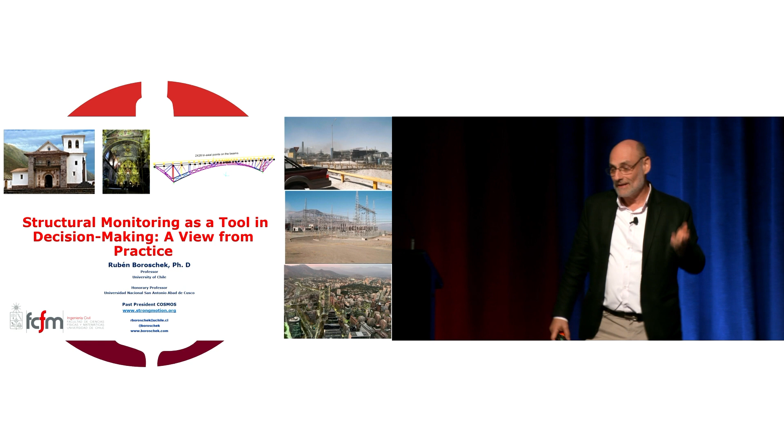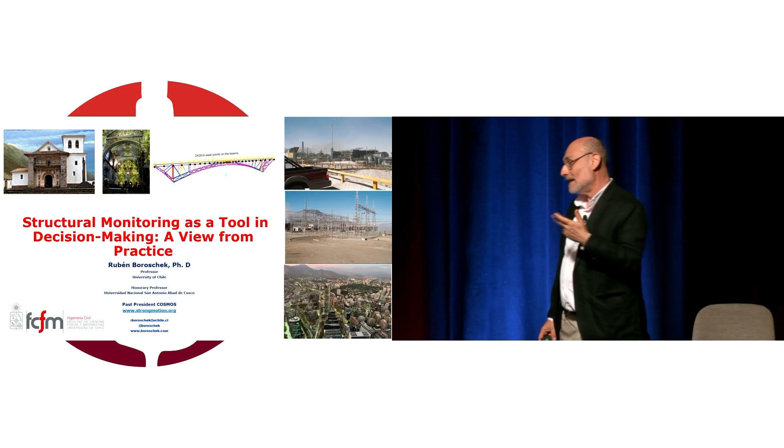We monitor with some trucks that pass by, and we were able to capture the dimensions of all the sections. Later on, about 6 months later, we were able to confirm that the sections we picked from data were okay. We have been doing this in the mining sector, mainly in Chile, but also in the electrical sector and in buildings, of course. So all this work is a mixed effort of university with a lot of students, also at the office with collaboration with many professors and engineers.

Monitoring is for existing infrastructure, mostly on the maintenance side. In order to maintain a structure, hopefully you have all the design and construction documentation, the maintenance history, the current condition of the infrastructure, all the environmental conditions that the structure is experiencing, whatever code changes happen, and if you're lucky, you have some monitoring there, and you do something with that information. I'm gonna stop on the last 3 points during my talk.

At least in Chile, we are mandated by law to monitor all dams, any type of dam, mining, water resources, whatever you have. If you have a dam, it has to be monitored for safety, and it has to report within a maximum of 3 days after an earthquake whether it's safe or not. The 3 days is because at the beginning these were analog sensors put in the dams, and there was no time to retrieve the data and do the analysis.

Now it's nearly immediate, as I'll show you some examples. In industry, only critical infrastructure like LNG, and some specific types of structures, have sensors in Chile, at least. Bridges, very little. And buildings, only where there is a problem, or if it's a hospital that has base isolation.

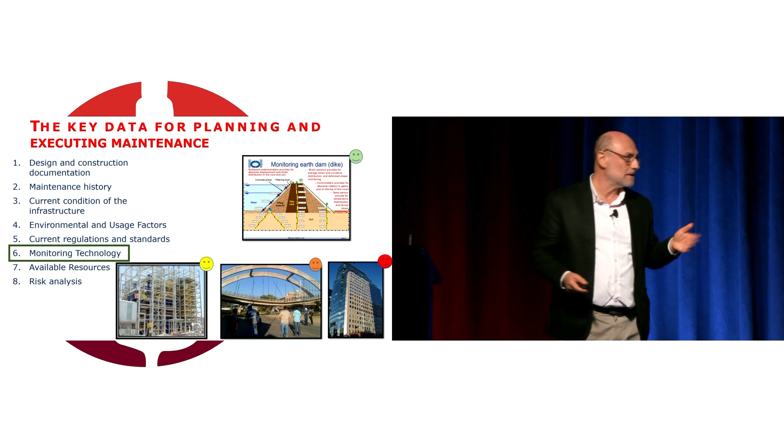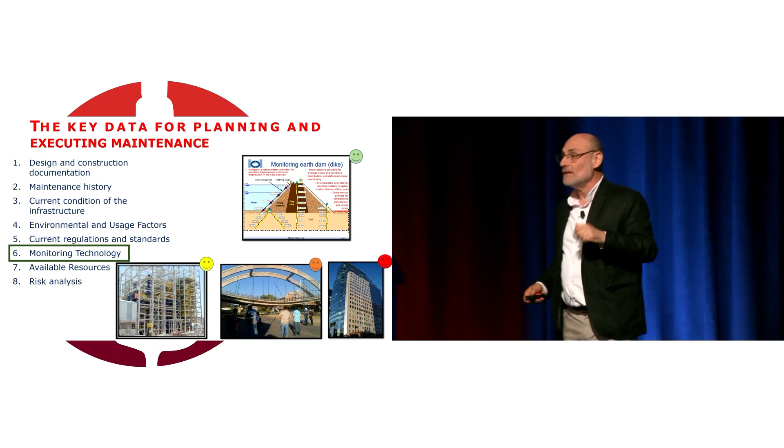We are now building most of our large hospitals, 1,000 beds or higher, with isolation, but also with monitoring, because we already had trouble with some isolated structures that users modified, and we didn't realize it before, and during a small earthquake they didn't behave properly.

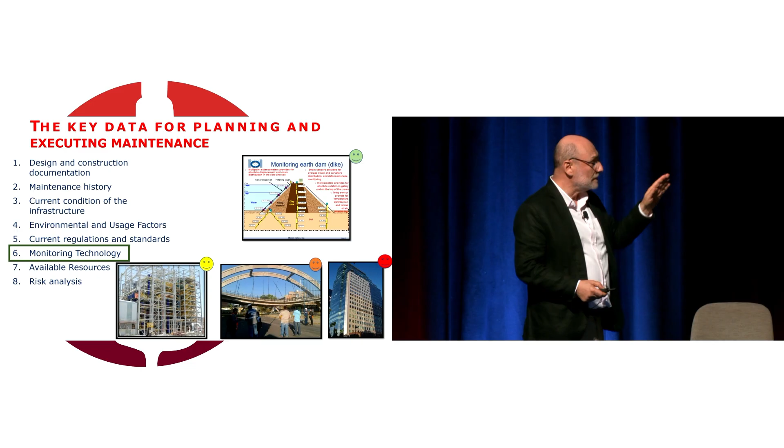So this was critical. But it always surprised me why civil engineers, the structural engineers, are not used to having data of their built environment. Why are we always so reliant on what we did at the design stage.

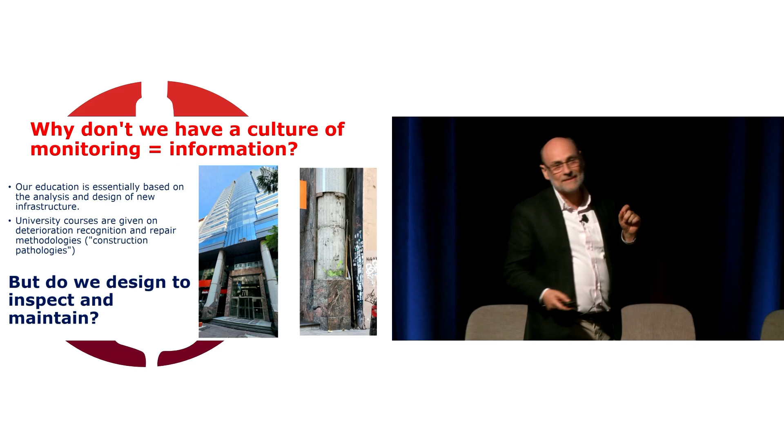At the university, I'm a professor of experimental dynamics. We teach how to design new structures. We rarely teach how to maintain a structure, or more rarely, how to design a structure to be maintained. So we just live with whatever we design, and we trust our design in such a way that it will never have to be maintained or inspected.

For example, in the building on your left, you see these two columns are critical for this 35-story building. But if an earthquake occurred, and in Santiago, where this building is, we have an acceleration of 2 to 5% g at least once or twice a year, and 10% g around every 5 to 10 years.

If the owner asks you to go and inspect the building, the first answer is that you will do a walkthrough. But if those columns are full of marble, there is no way you can inspect that structure. So you can offer the owner to remove all the marble, and then he will say, no, I will look for another engineer.

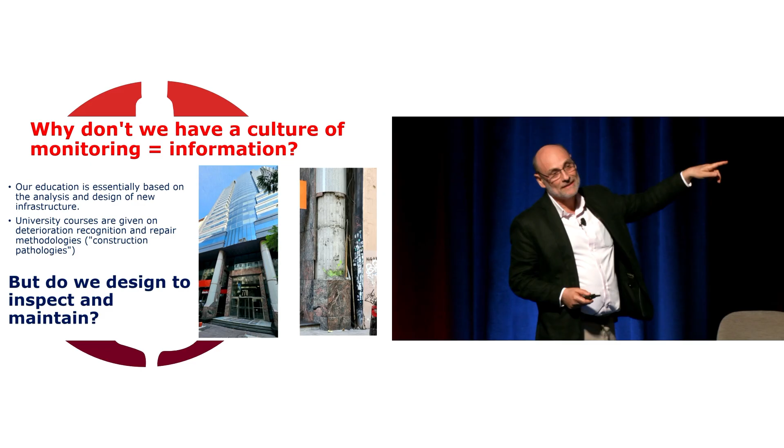So if there were damage, and it didn't express on the surface, there is no way you can control things. And we don't design for this. We don't design for inspection.

For example, this building is 54 stories tall. The first floor is 14 meters tall, and it's encased, a steel pipe with concrete-encased columns. Everything after finishing is covered with marble again. This building suffered damage during the 2010 earthquake.

The owner asked us, is there any damage on this building? And in order to answer the question without monitoring, we would have had to remove all the cladding, and that was not an option. I'll tell you what the option was, but first I'll tell you a couple of sad stories.

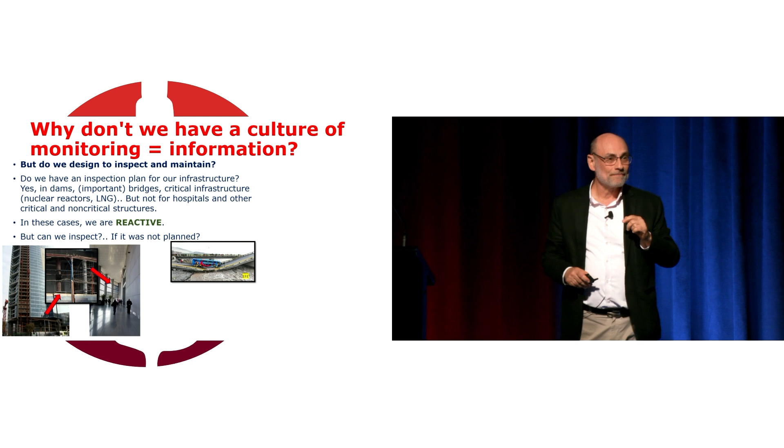For example, this bridge is in Peru and collapsed last month. Can you inspect for scouring? It's very difficult, especially in non-clear waters. So how do you do this?

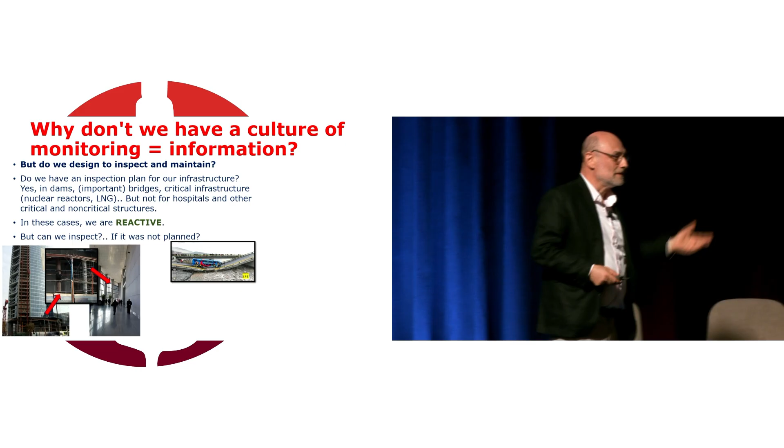You send an engineer to inspect the bridge — what can he do? He looks from the top, or with some special tools, but he will not go underwater, especially in this type of river. You know there is scouring, but there is no way to control it. He goes back to the office and says, I didn't see anything. And then the collapse occurs.

This structure also collapsed last month, killing 8 people. This is the courtyard, the food courtyard, of a commercial center, and there were people inside.

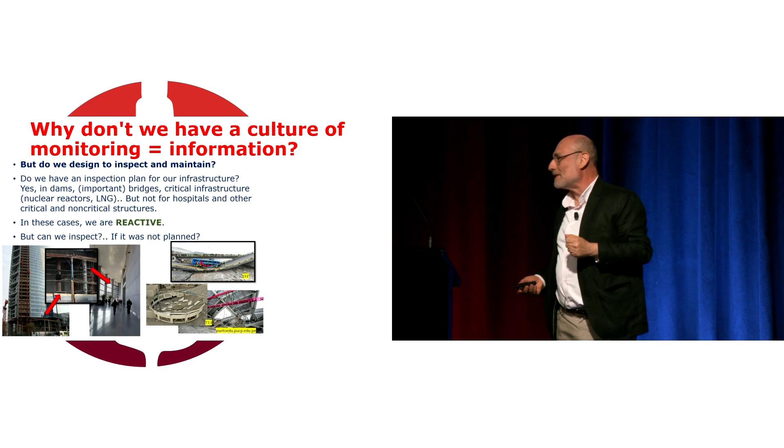The owner of the structure knew it had a problem, so he sent an engineer to do an inspection. But the roof was more than 15 or 20 meters high, so he just stood on the slab, looked upward, and said, okay, the only way to inspect this is to go up and remove whatever covers the main elements. But he didn't do it because the owner didn't pay for that type of work.

So 8 people died. Yesterday, or the day before yesterday, 130 people died in a dancing place in the Dominican Republic.

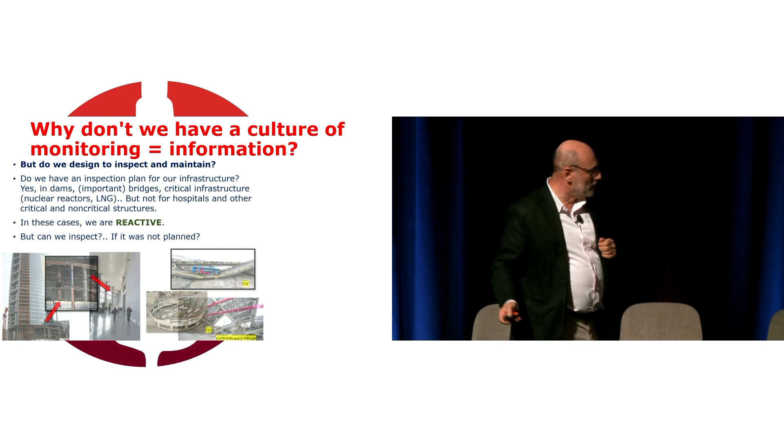There is another case that for me is extreme. It's another building in Santiago, like a 30-story building, or 25-something. And you see a column that is 5 stories tall.

During the design, the architect asked the engineer to make the thinnest column possible. So the designer, worried about the overturning at a corner column, did a nonlinear analysis, made a very thin column, and put some irregularities in it in order to capture whatever axial load was going there.

And so he ended up with the thinnest column he could develop with the analysis he was doing. Once he finished, the architect saw the column and said, no, this is too thin — I will cover it up with a bigger column so people trust the building.

But the engineer didn't change the size of the column. It's a very critical column designed with nonlinear elastic element for compression and everything else. But when you go there and see it from the side, it's very thin. It has gone through 2 earthquakes, design earthquake, 0.4 to 0.5 G at the ground. No inspection done, because to do the inspection you have to go 5 stories and remove all this cladding, and they are not willing to pay for that.

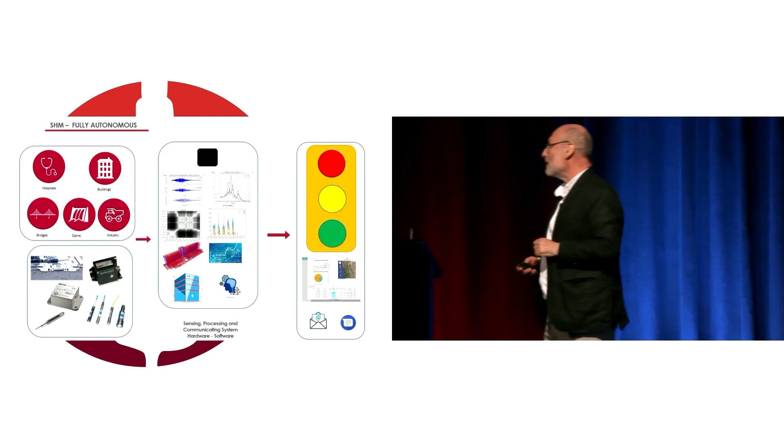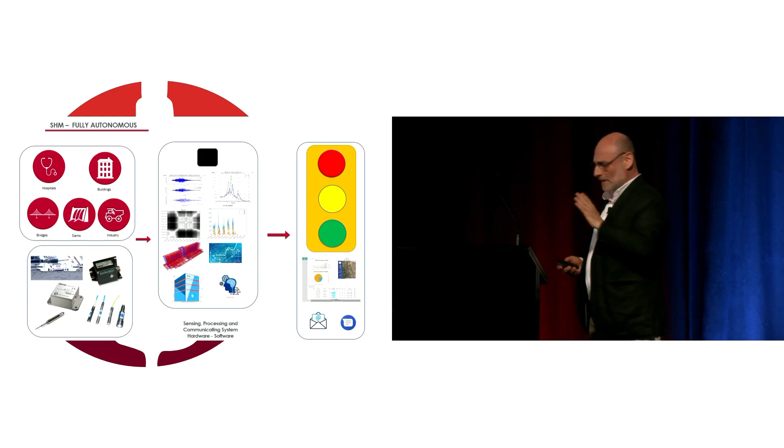So in some structures, as I'm going to show you some examples, we do monitor. Hospitals, dams, some key bridges, and maybe some industry. The idea is to put sensors, any type of sensors that give you an answer to your damage scenario: strain gauges, pressure cells, displacement, tilt meters, accelerometers.

That should be sent to a computation center. It could be local or remote, depending on your resources and conditions. Then that analysis should be sent to you in a manner that is understandable for the person receiving the information. It could be a simple traffic light or very detailed data if you are an engineer knowing the structure you are dealing with. But it has to be fully automatic. We cannot do it manually.

And this is structural health monitoring. If you don't do it automatically, it's just monitoring, the standard things that we did maybe in the 50s or 60s. But if you are going to do it fully automatic, then we will call it structural health monitoring.

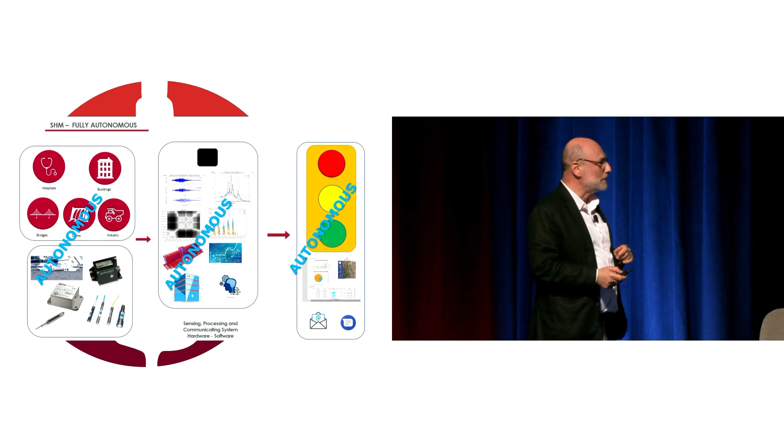And what type of sensors are you using? Well, we are using sensors that can send data. It could be wire or wireless, whatever we want. At the beginning, we started with very expensive sensors, maybe $1,000 or $5,000 per channel. But now we have these MEMS sensors for accelerometers and other stuff that are very cheap, $50 or something like that now.

And the thing I want to show you, as an example, is that we can use cameras now, video cameras, as a sensing instrument. And of course, the drones and things that were explained during the presentations earlier during the Hualien earthquake. So now we have a huge amount of sensors that we can use to detect what's going on in a structure.

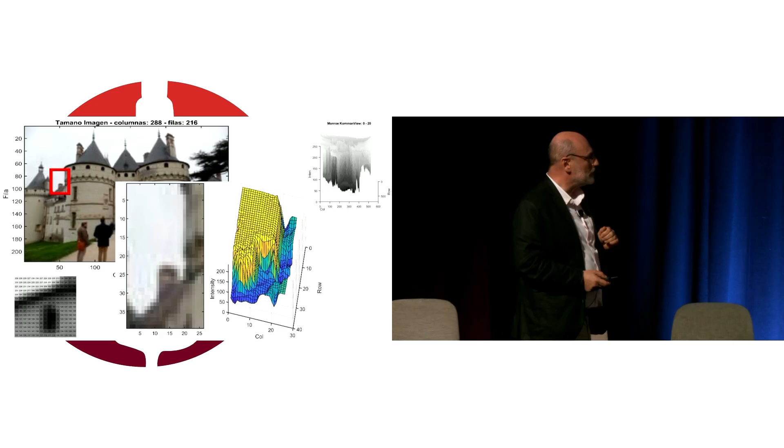So let me stop here for vision sensors. For those that don't know, an image is just a matrix of intensities, like having a matrix where the intensity is a number. So I don't know how to treat a video, but I know how to manipulate matrices. A video is just a sequence of matrices with numbers in it.

So what I do now is take, for example, the red rectangle you see there, the chimney of a castle, and represent that as a surface. And in the surface, I can get the maximums, the surrounding areas of that number, and get eigenvalues and many other things that we like to do with matrices. So that's what I'm going to do.

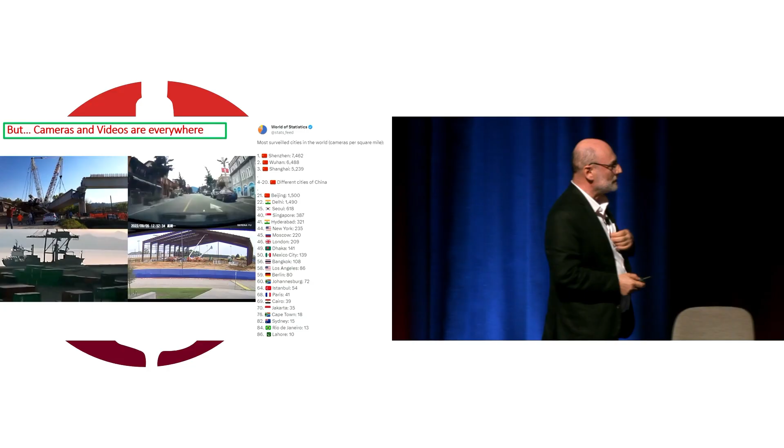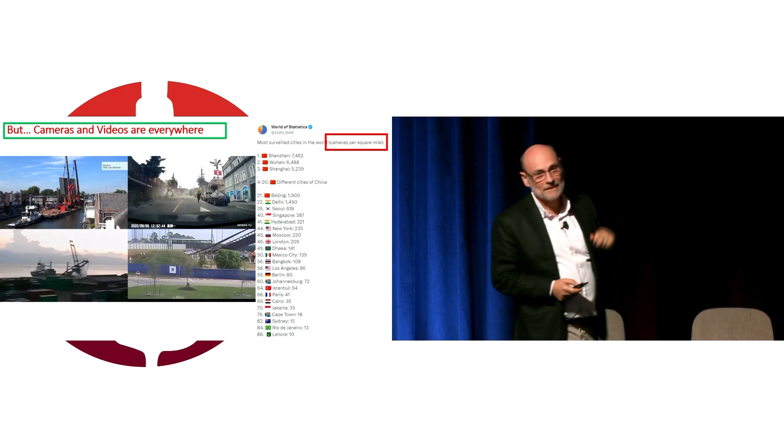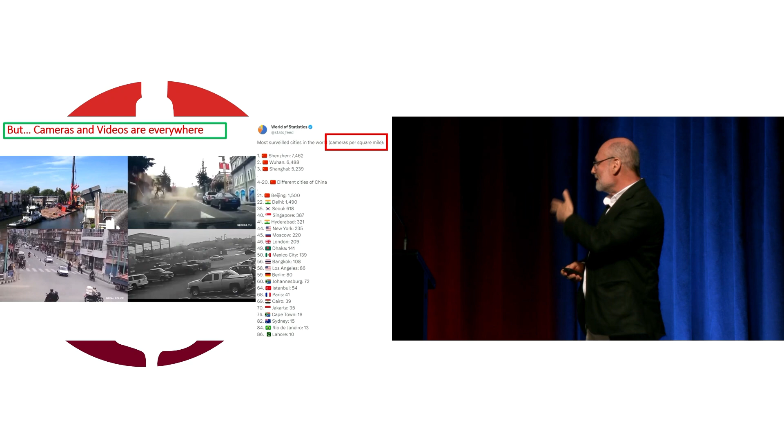The nice thing and the opportunity here - sorry, some videos are from earthquakes - is that there are cameras everywhere now. Imagine, in those lists I put there, this is the number of cameras per square mile: 7,500 cameras per square mile in some Chinese cities. But typically we will get at least 20 or 100. Actually, if you are in Japan, I have seen the news where they can follow a person all the time, except in the bathroom - that's the only place they don't see a person when they want to track him. So why don't we use this information? We have to just learn how to use it.

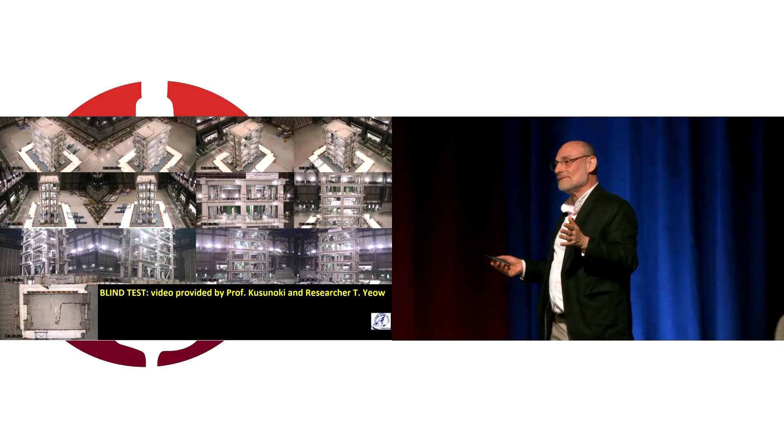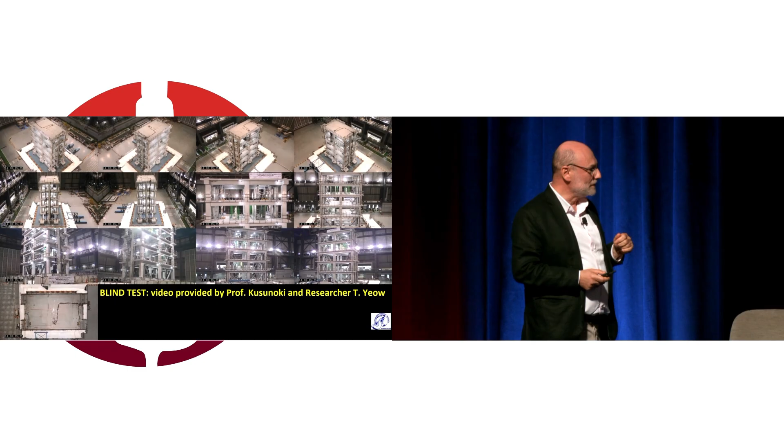So on my sabbatical 2 years ago, I went to Tokyo University and asked Professor Kusunoki to give me a video of a test in E-Defense, but just the videos, not the data. Trevor Yeow, who's from New Zealand, helped me with the data. He sent me the videos, and in a month I came back with what I can take from the videos. So these are the videos.

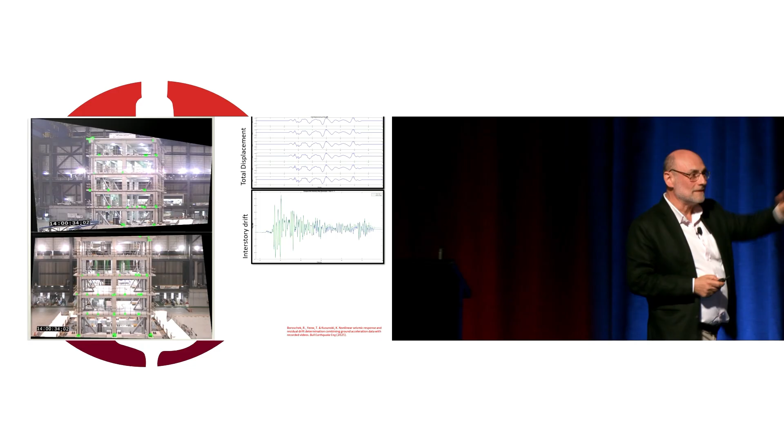So by doing some manipulation of these many green dots, you get the traces of the motion. If I get the difference between the traces on two floors, I get the interstory drift. In that figure you see in the middle, there are two lines, one green and one blue. They're quite the same. I didn't compare them myself, I gave it to Trevor Yeow. So this is the interstory drift for this building, and the error was less than 1%, okay?

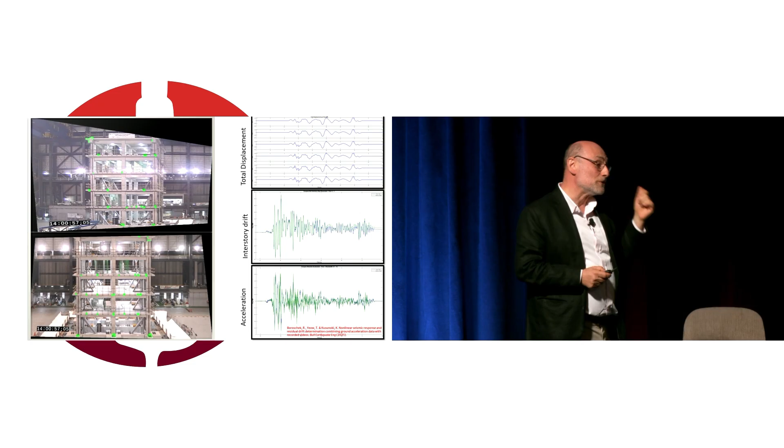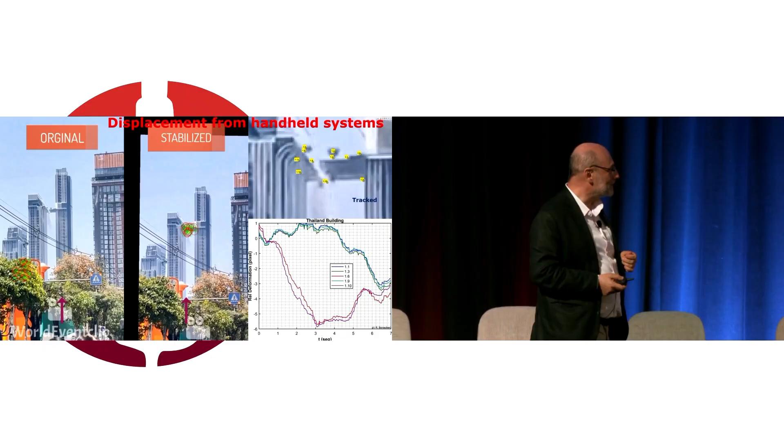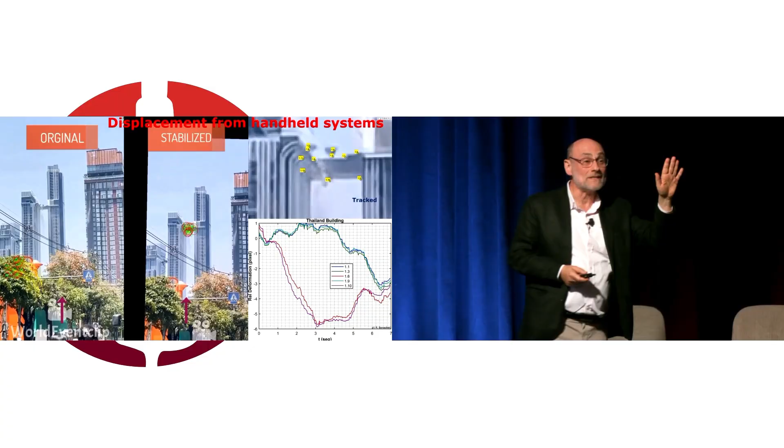For example, these videos from Thailand, I just did it three days ago. So I downloaded the video. The left one is the original handheld video taken by somebody, you can see a red arrow on the bottom showing how it moves around. The center video is where I take the video and center the matrices so it doesn't move, and after that I stabilize the video. You can see the boundaries change.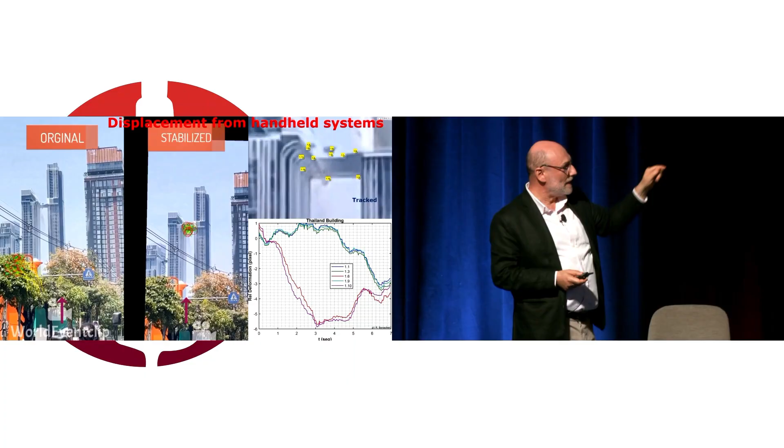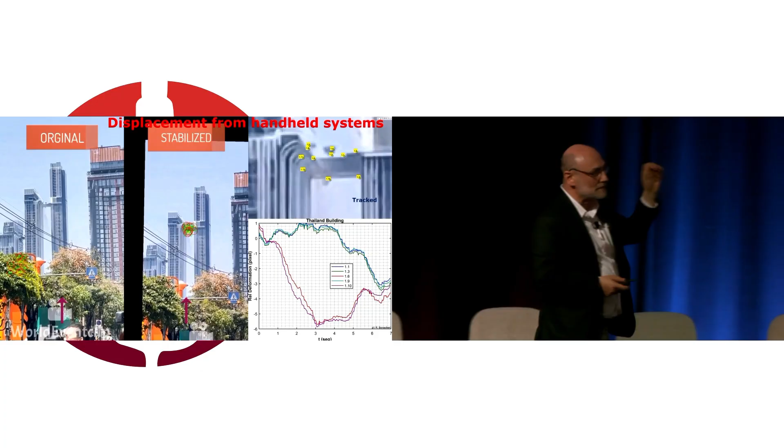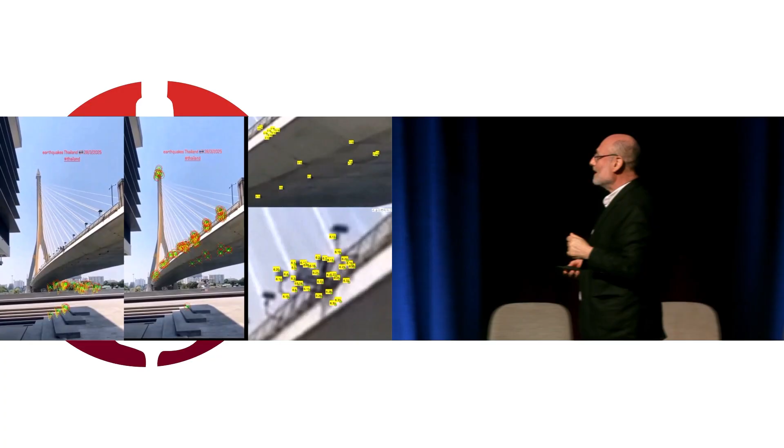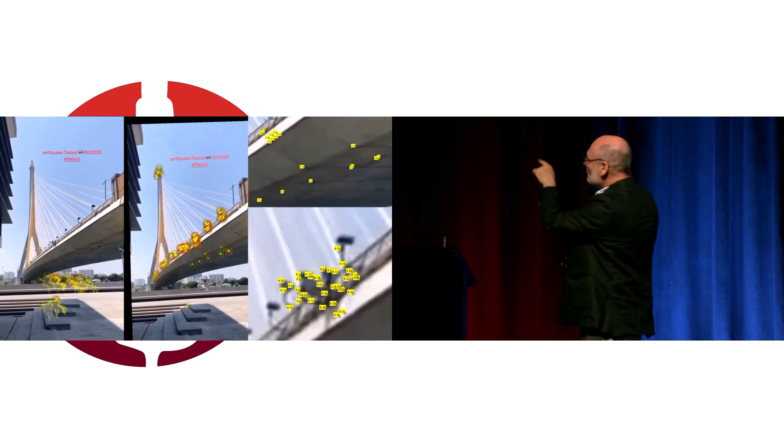But not only that - if I take the video of the cable stay bridge in Thailand again, on the left side you see the original video, and the yellow traces are from the handheld phone movement. I take that video, stabilize it, and get a stable system. You see it doesn't move anymore on the ground, but the bridge keeps moving. I zoom in on any place of the video, and now I have so many sensors on that structure that I can get the time history. We haven't put any sensor on the structure - I'm just using security or handheld cameras. Then I can do all my system ID that I know how to do.

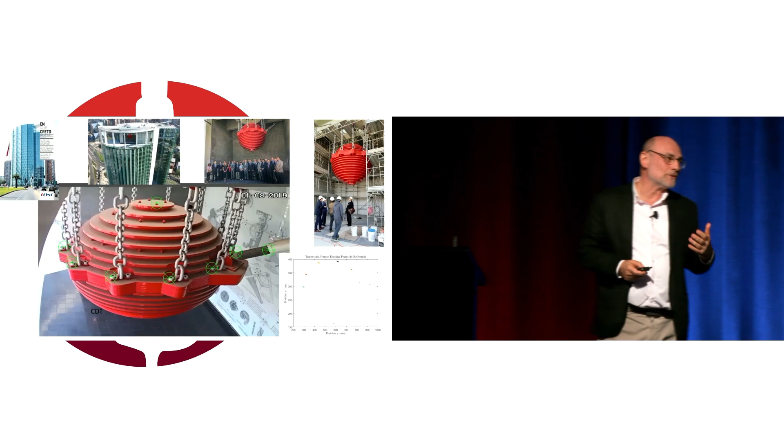It's very hard to use handheld cameras during an earthquake, but there are so many cameras. For example, in this building in Santiago, we have web cameras that cost $15, okay, that's the cost. But it's a bullet camera that doesn't vibrate during the shaking. So during the earthquake, it's looking at a tuned mass damper, a very short length tuned mass damper, but I can trace the motion instantly using just the video. No cables, no energy, except for the video camera.

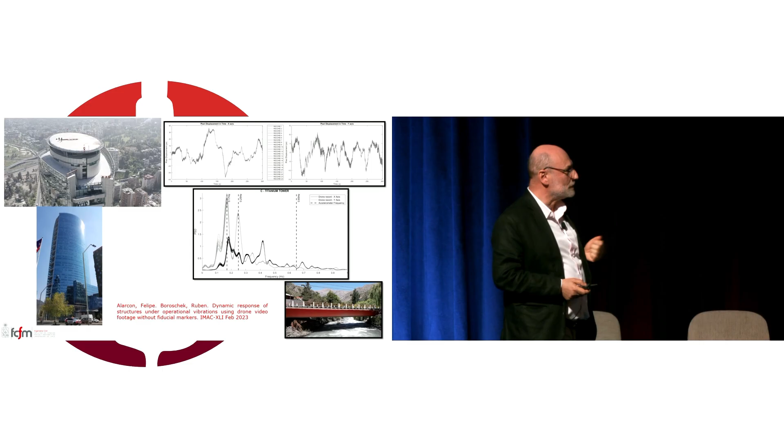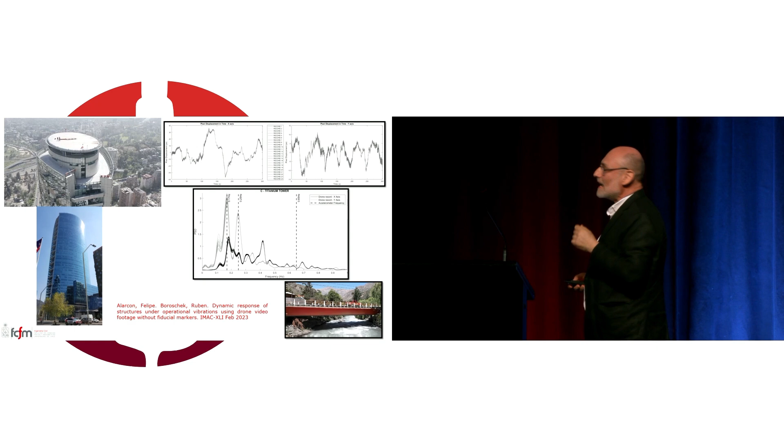Also, we have the option with these videos to use drones. So what we are doing now is flying drones around buildings - flexible buildings - and bridges, and we can actually get mode shapes and frequency from the drone video. It's possible just to fly around, and if the structure is flexible enough, we can capture it. On the top part is the drone video tracking, and in the center is the frequency, and the vertical lines are sensors we put in the building to have the ground truth, the real value for the frequency. The error is less than 5%.

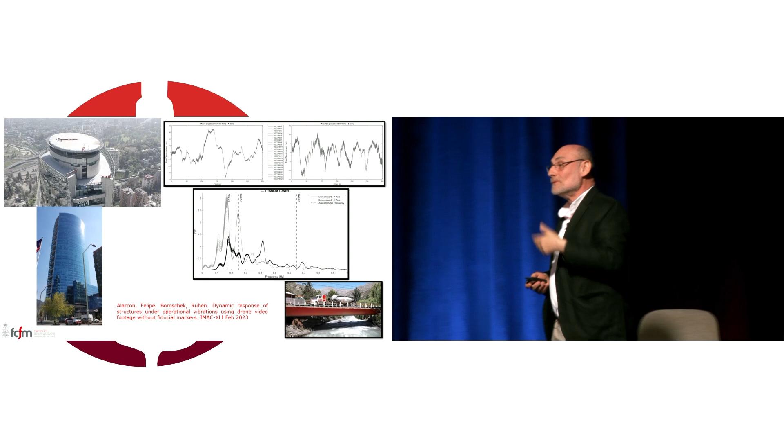But I didn't have to ask permission to monitor the structure. I just needed to fly around the structure, okay?

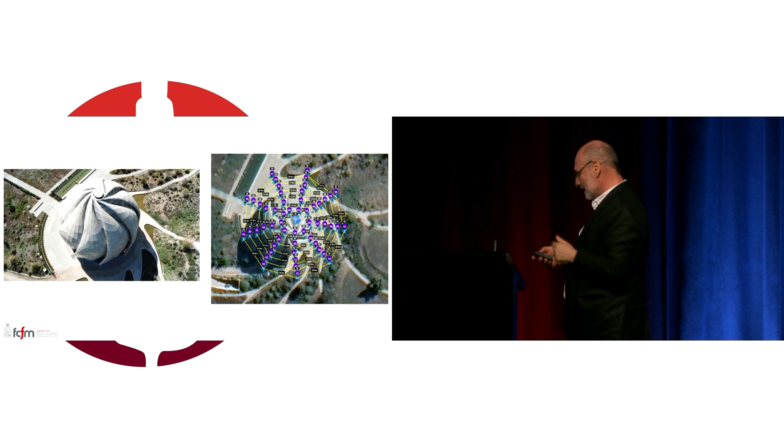With the Baha'i temple in Santiago, it's a crystal structure, very tall one. It's base isolated, so we offered to install a drone, a self-controlled drone. It parks itself, charges itself, and has a flight pattern defined by us. So we can fly around the structure automatically, get pictures whenever, as frequently as we want, and create a 3D model of the Baha'i temple. Also, the security cameras inside are looking at the ceiling, and I can trace the vibration of the ceiling without having to install anything. More importantly, I don't spend money on maintenance because the security cameras are maintained by the owners of the structure.

So it's a tool that is not the solution for everything, but it's contributing a lot to what we're doing now. So forget about videos, it's just a tool - it's not the center of my talk, but some example of decision-making based on data.

During the construction of this 54-story structure - the first building 200 meters tall or higher in Santiago - the owner of this building, who is an architect, hired us to monitor the construction to validate the design model of the engineer. The engineer was very happy because he's very open to observations, so he didn't have any problem with monitoring. Other people have a bad reaction to monitoring because they will be confronted with reality.

And when reality and modeling don't match, they have to explain things, take time to explain things, and maybe they don't know the answer why they don't match. Okay, so that's a problem that we can discuss.

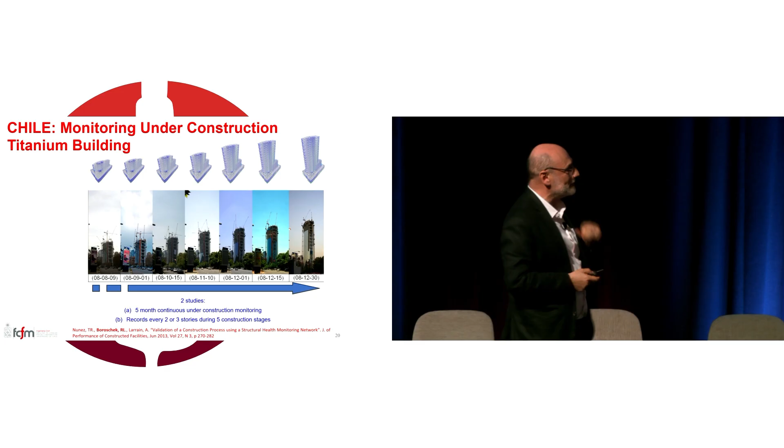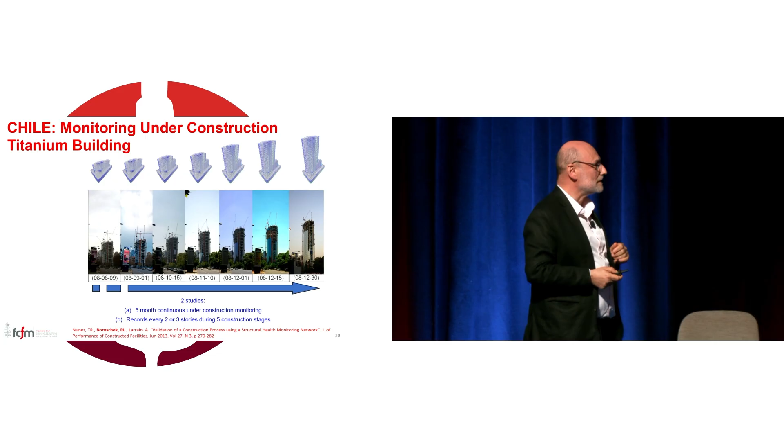In this case, we set up a program of monitoring with a few sensors that give the properties of the structure automatically every 15 minutes. Nobody was touching anything. On the left, you see lines going down. On the bottom, the x-axis is time in days. On the vertical axis is frequency, the inverse of period, the mode shape - the lower lines are the first 3 mode shapes of the system. So we monitored the system every 15 minutes for 5 months.

And of course, the designer said, you're crazy, I cannot even open my email with all the data you're covering. I just want to know if the model fits reality or not.

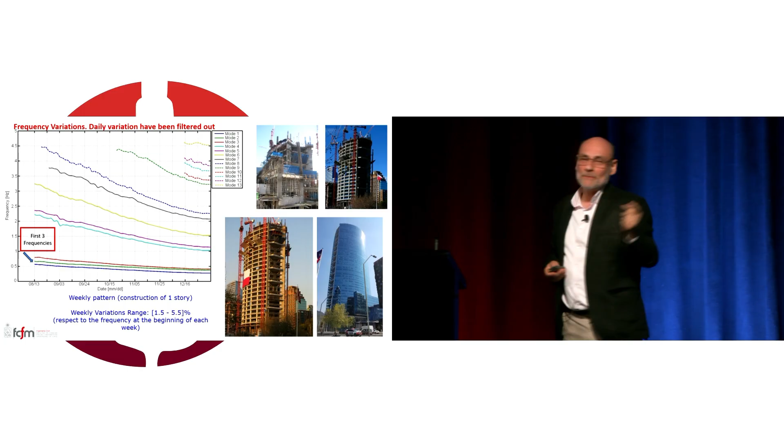So every week, we took the structural design model - not a digital twin, just the design model, what's called pre-digital twin model - and compared it with the data. It was very interesting because you see the first mode and second mode there, with 2 lines, red and blue - one is the model, and the other is the real data, the real period of the structure.

The second mode had a problem, just at the start, when we were at floor 6 or 7, I don't remember. So something happened, we detected the problem, we sent the information to the designer and the owner. They're quite open, so they sat and made a decision. They realized why there was such a big jump in the period - it was a torsion problem not considered at the design level.

So the options were: we demolish, or we evaluate the condition we have now and project what's going to happen with this building when it's finished, and then decide if we demolish or not. In this case, they didn't demolish, and it was finished as a different structure. But it was known, and the data was there to take the decision.

This instrumentation was taken out in January 2010. In February 2010, the 6th largest earthquake in the world occurred, and this building got damaged. All the balconies on the top part of the building fell, because this building is 200 meters tall and actually amplified motions in the vertical direction, not only horizontal. Even for a small earthquake, you can notice how the building is elongated in the vertical axis, so it amplifies a lot.

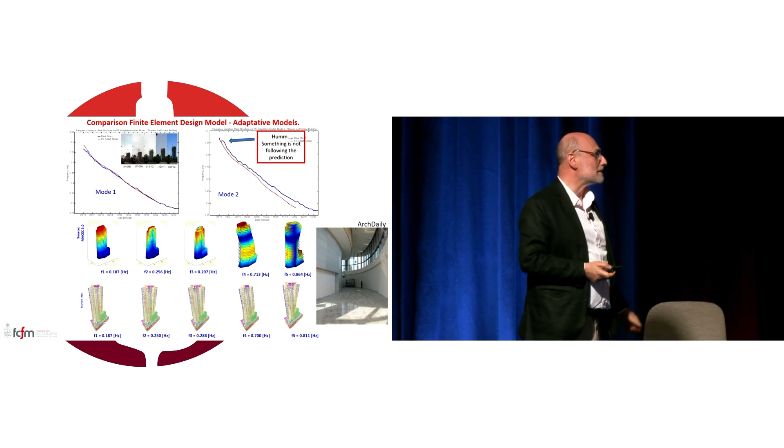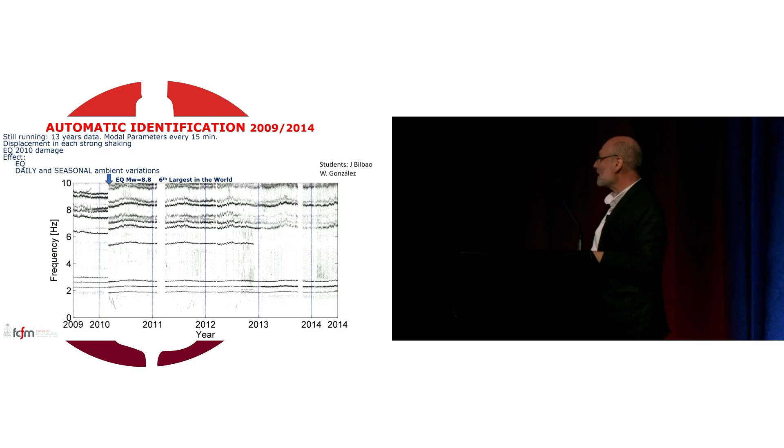We have been monitoring continuously - structural health monitoring - since 2009, so nearly 13 years now. What you'll see here is for a 9-story structure, again with lines - look at the bottom 3 lines. There's like something sliding down right there - that's the occurrence of the 2010, 8.8 magnitude earthquake. These lines are natural frequencies, the inverse of the period.

This building suffered a drop in frequency that we captured in less than 15 minutes and communicated to the owner - that's us, because it's the faculty of engineering. We knew it was damaged, a 20% drop in stiffness... in periods, so a 40% drop in stiffness.

So after inspection, it was decided that it just needed paint - there was no retrofit or any repair. This is a 1960 building, and we know it behaves properly. So at least we know exactly what happened during the earthquake.

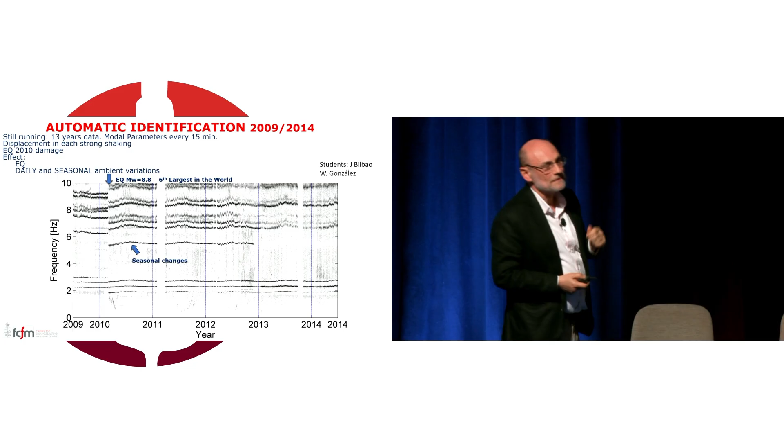You see all the frequencies drop, each mode in a different way. But the lines are not completely straight - they have shapes associated with seasonal changes. Temperature, humidity, the sun position changes the period of the structure. Not only that, if it rains or doesn't rain, we have changes that are as much as you see there. And of course, if there's an earthquake, there's a change. So one important thing we learn when doing structural health monitoring is that the structure is not your design model.

It's not a fixed parameter system.

On the top here, for example, is the first mode with the seasonal changes: summer, winter, autumn, spring. The change is around 5% period change, but the mode shape doesn't change so much.

On the second graph, you see in blue the temperature outside, scaled to a normalized value. So when you have high temperatures, the period elongates or the frequency goes down, and you can see that on the third plot when we twist or overturn, multiply by -1.

But the important thing we realize is the daily changes. On the first line graph, we have the first mode in orange and blue is the temperature - sorry, the other way around. Temperature is orange, blue is the first mode, or the second and third on the line.

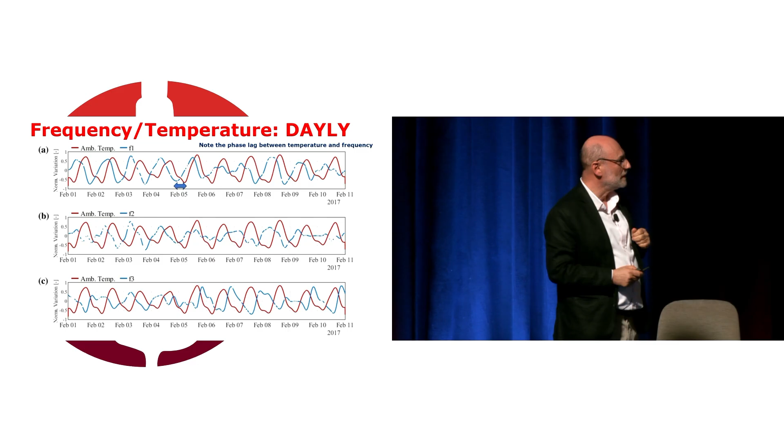What we realize in this building is that there is a change between 1% or 3% just for a temperature change in the structure. And that change is not instant. So if it comes to be 24 degrees Celsius now, maybe in 2 hours the building will be flexible enough. But it depends on the time of year, because sometimes we have the sun on summer on top and in winter on the side. If your structural system is not facing radiation or the sun, then you will have a different pattern. We have done this in many buildings, and it's completely structure dependent. What's the range? 1 to 6 or 7% of period change just because of environmental conditions, normal conditions.

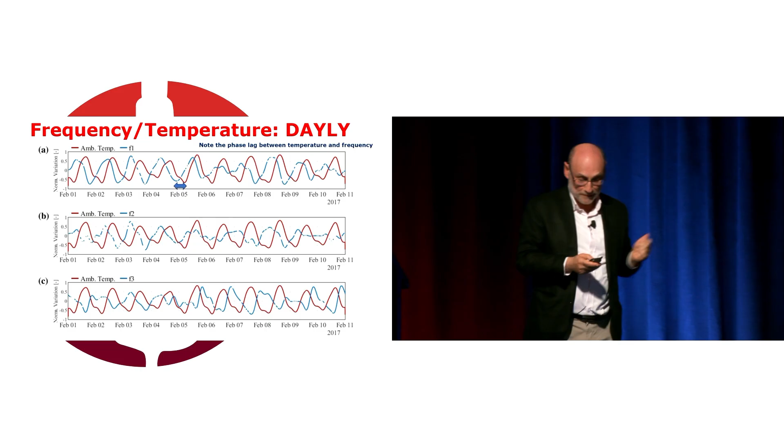But we have earthquakes. In Chile, we have a magnitude 4 every 4 to 6 times a week. So we can use that data, small shaking, to analyze the changes in the structure due to amplitude. So quickly, because I'm taking too long, we do an analysis every 4 seconds, and we get a response like this.

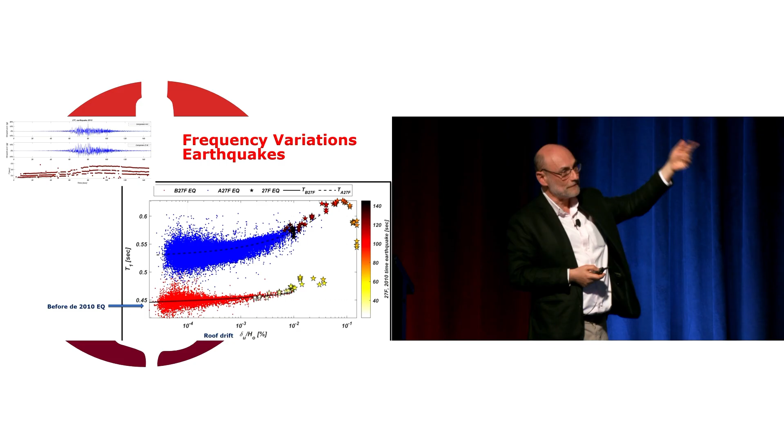This graph is the same building. The red part is the period in the vertical axis, and the horizontal axis is the drift of the structure. So what are you seeing there? The red, for example, shows that depending on the level of deformation, the period of the structure changes, but it's linear elastic - it deforms, elongates the period. When the earthquake is gone, it comes back to the original.

You have a small earthquake, a small period change. You have a big earthquake without damage. You have a change that is 10%, no damage, okay?

The stars you see there are due to the earthquake. Red is pre-earthquake data. Blue is after the 2010 earthquake, meaning the period change was 20%, and the pattern of change completely changed during the earthquake. The stars are 4 seconds of earthquake time - the lighter ones are the beginning of the earthquake, and the darker ones are the end. So we can track completely how the damage occurs on the structure.

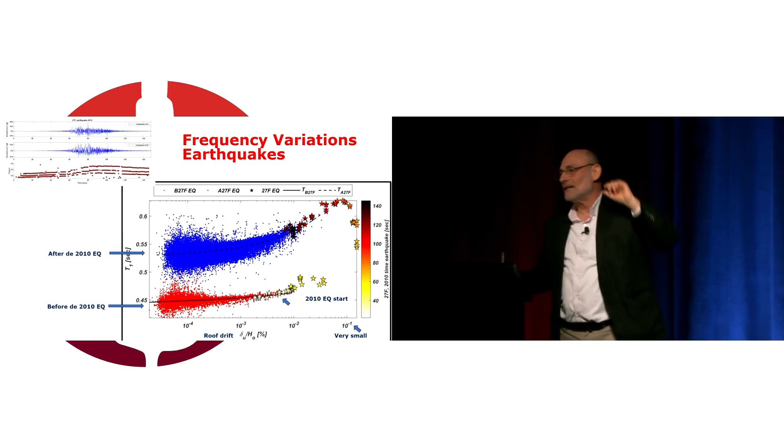So how do we use this? Well, the first thing is you need a lot of buildings instrumented. So one thing is to use cameras - we are not going to talk about that anymore. But what we're doing is using cheap sensors, only one sensor in a building, on the top for example. And we can trace deformations.

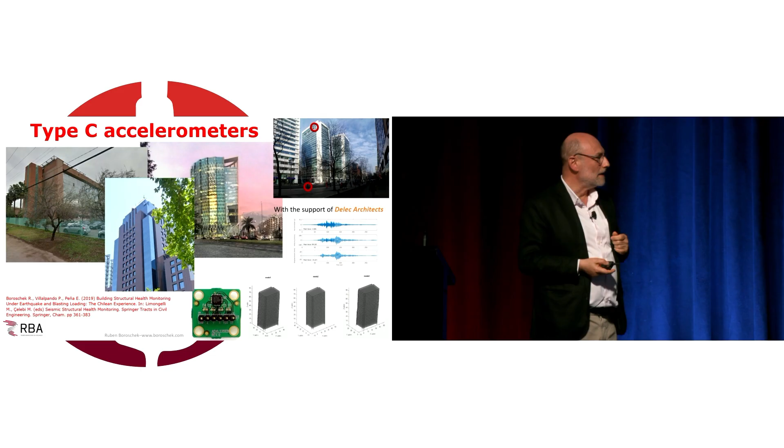We don't have the base, so we have a problem there, but we more or less know a little bit of amplitude. If we have a sensor close by, we can do some type of information. It's very cheap - less than $1,000 actually. And we get very good data on the period. We can track a change of state with a simple sensor on the structure, and we have like 40 or 50 of these structures. So many of the work we do is just with data.

This is important - for example, on the left side there are some blue traces. It's a train passing, a subway train. We were hired to tell the owner which wheel was not rounded enough. So we put sensors on the rail, the train passed by, we get the vibration, and we're able to tell it's the third wheel on your left that is having a problem.

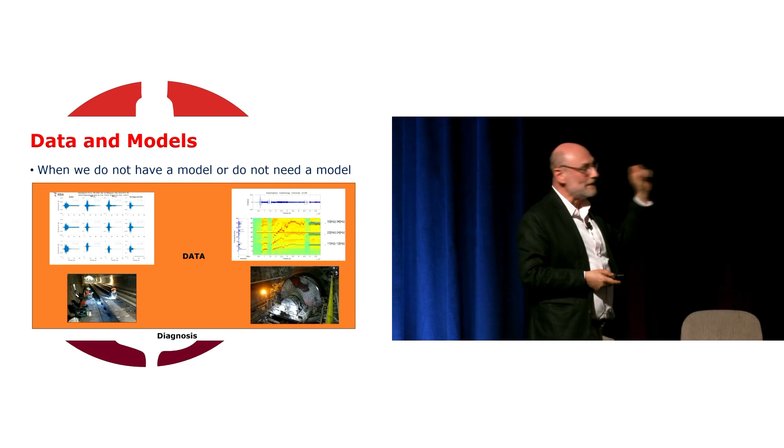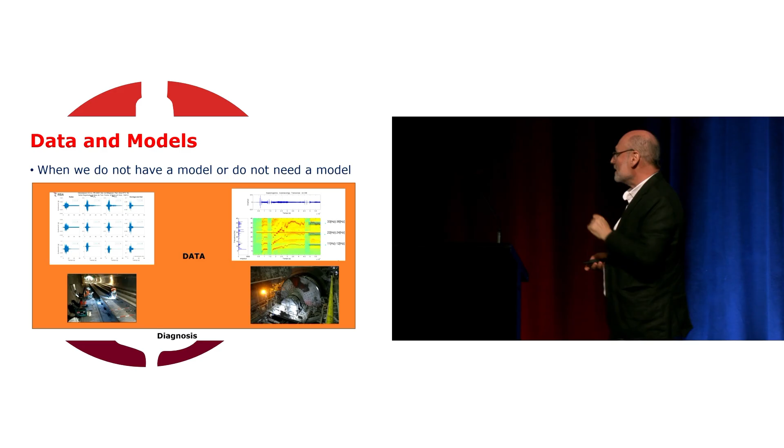We don't have any model. We are not mechanical engineers - I'm a structural engineer, okay? But we are able to pinpoint just with data which wheel is having problems. On the right side, you see a huge mill - I'll show a little bit more of that. That mill is having problems at the foundation level. Only with data, we can tell what's the stiffness and the change of stiffness of that structure.

So I'll show you some examples of data-only information. This is a suspension tank of very thick sand coming from a mining project. You can see a person installing the accelerometers - it's a huge, huge tank. The problem was that in certain conditions, the tank vibrates so much that the bolts are getting loose.

So it's a resonance problem. But what is the resonance? I can do a model, but doing a model with a tank where the fluid level changes and the density changes, and there are fans agitating or moving the water, is very difficult. So forget about that, just data.

So I put the sensors, monitor when, at which level, and at which density of the liquid we have resonance. So I capture those areas of resonance, and I tell the owner, don't stay in this position too long, because resonance is a building process. You need time to build huge deformation in resonance.

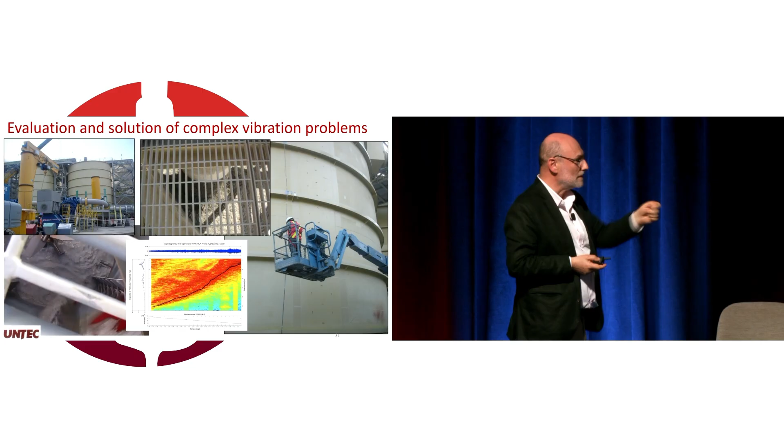So you capture that you are amplifying the deformation with the sensor. Immediately you tell the owner, get out of this stage, and you do it automatically. You don't need an operator decision looking at a graph, you do it only with data.

In this case, we have a main mill. It's called a SAG mill in a mining project. The dimension is nearly 14 meters, and the foundation was cracking. So they asked us, can you monitor it? We will repair it. Can you monitor that the crack is definitely repaired?

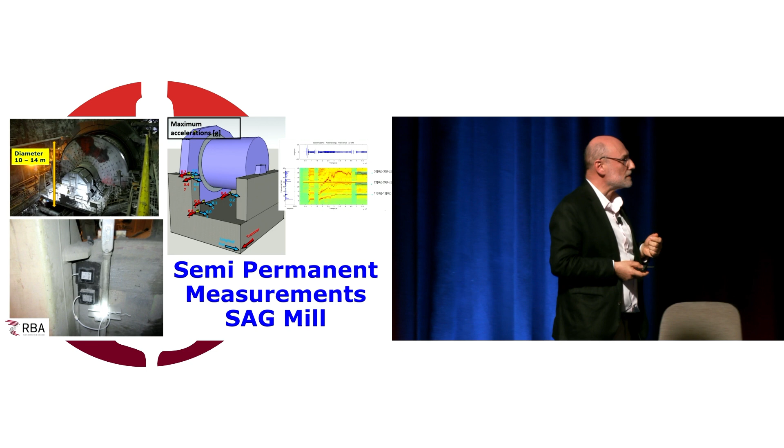So what we did is instrument the foundation, and just with data, monitoring prior to the repair and for many months after the repair, we were able to tell them the repair is working and is safe, and we removed the instrumentation. So no models, okay, just pure data.

Sometimes we have some models, and this model allows us to predict things. So we pass from a diagnostic case, just pure data, where we can say something happened, but with models, we can predict what's going to happen in the future. Or better, we can predict responses in places where we don't have sensors.

So in that case, for example, it's a wharf, a very small wharf. They hired us to monitor the wharf for berthing impact, overloading on the main slab, and current scouring of the system. So we installed the system, and just with the data, we learned in 3 or 4 months what was normal, and with the model, we tried to pinpoint where the damage was, in case it was needed.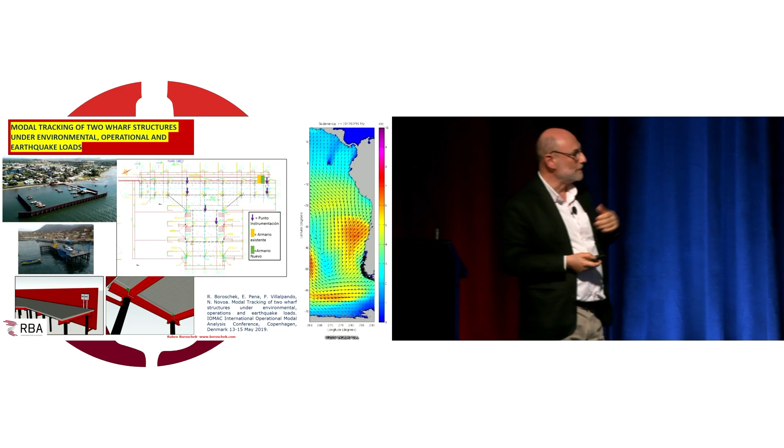So for the port, we were able to install some sensors, let the data run, and learn what it meant, for example, when the tide was high or low, what was the natural period. And after a few months, 2 or 3 months, we could set alarm or alert levels, just with data. But also with the model, we know more or less what's going on.

The other extreme is to have very good models, digital twins, really. These are really digital twins, where I can fuse data and modeling. And with that, I can do things that are pretty amazing.

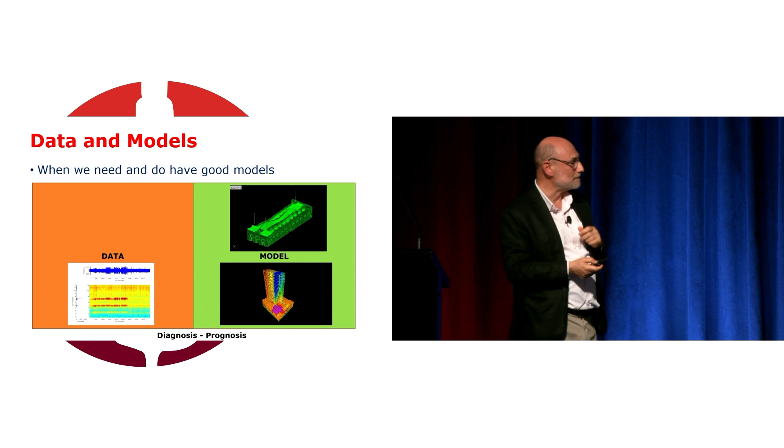This is a 700,000 element model on top for the Cathedral of Santiago, and a building on the bottom is a 60,000 element structure. Everything has been adjusted according to the data. It takes a long time. So I'm going to stop on this example.

This example is a hotel building, administrative building, and a casino building in the middle of a mine, 25 meters from the blasting areas. So the contract that we had in this case was to monitor the building, keep it safe, install instrumentation, and identify issues. They would blast every 2 days for 2 years.

There was some problem with the construction, the replacement building got delayed. So in order not to stop production, they decided to monitor the building, and every time there was damage, they would repair it. So our job was to put the sensors.

Detect the blasting, and in 30 minutes they should have drawings showing the most possible areas of damage. They would have another crew from another company that would repair it in 1 hour if it was mild damage, or they would stop the process if it was big damage. We did this for 2 years, and we actually won a prize for being able to do this.

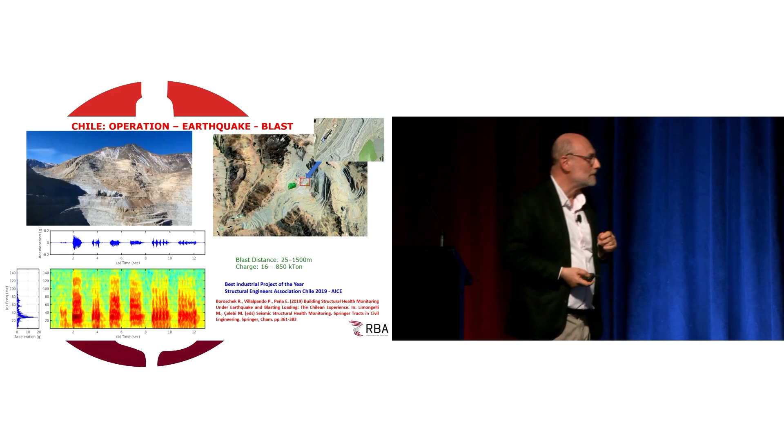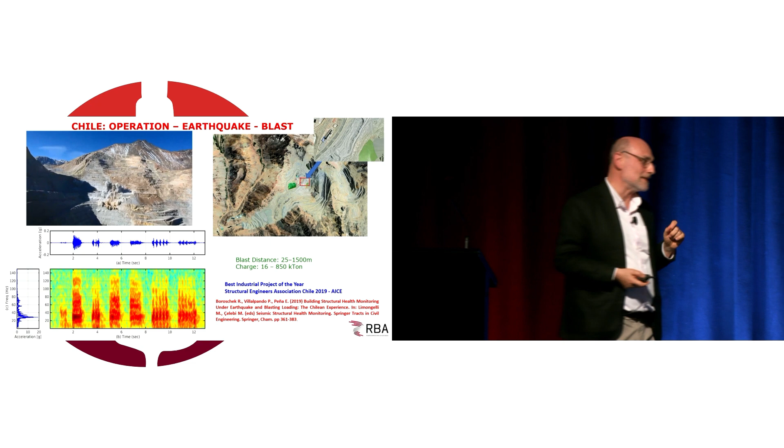Because we have a controlled earthquake, so it was easier. The amazing thing is the accelerations on the building were 2 times gravity, 2G. It was not a very small shaking, it was a huge shaking. So how did we do this?

It's a mix of data and models. In this case, we got structural models, linear and nonlinear, and we did fragility studies and vulnerability studies. We monitored the blasting, how the blast went through the ground. We input it into the model, and we established fragility curves depending on the scale of the blasting.

So we have like a street light, green, yellow, orange, and red, that would go to the client because he doesn't actually understand what we're doing, but the street light was clear.

And so we developed the system. We have several models on the cloud, and we have sensors on the ground. This is a very redundant system. Every time there was a blast, it was recorded, the data inputted on the ground, and we sent it to the cloud. Many models were running, and with the data, we evaluate if damage or a change of state occurred.

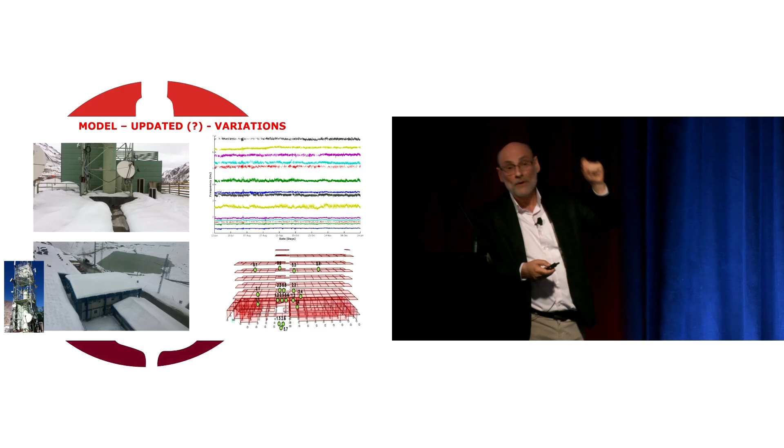With the model, we identify where the damage could have occurred, and drawings were developed automatically. All the floors were marked in a special code, and we know all the elements. All the elements have a street code, and we send the report in less than the 30 minutes that was our maximum time, fully automatic.

And they pay us for 24/7 engineering, because it's not only for blasting, but also for earthquakes. The building was weak, there were 300 people working in that building, so it was very critical. After 2 years, the building had to be demolished, as you saw. So this was fully automatic, we just monitored that things were going on, and the decisions were taken like this, and it worked perfectly.

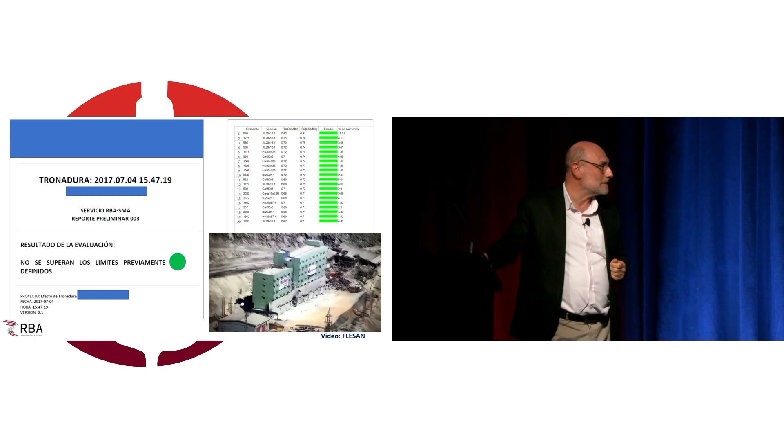Actually, they had a higher increase in production. This is one of the things they were worried about, that they could not produce because of the building. They cannot operate without the hotel, because the workers sleep there. So this monitoring helped them to keep the building.

Also, we were able to identify when the blasting sequence increased the damage, so we modified the blasting sequence and the time between blasts, using smaller blasts, and at the end of the project, the building never got damaged. They were blasting very close to us, but the sequence was scheduled in such a way that the blasting didn't affect the structure.

But in order to start closing, because 45 minutes is hopefully my presentation, I want to say that it's not magic. Monitoring is not magic, and there is an excellent example from Francisco Carrion, of Mexican transportation, who was asked to monitor a cable-stay bridge whose cables were snapping.

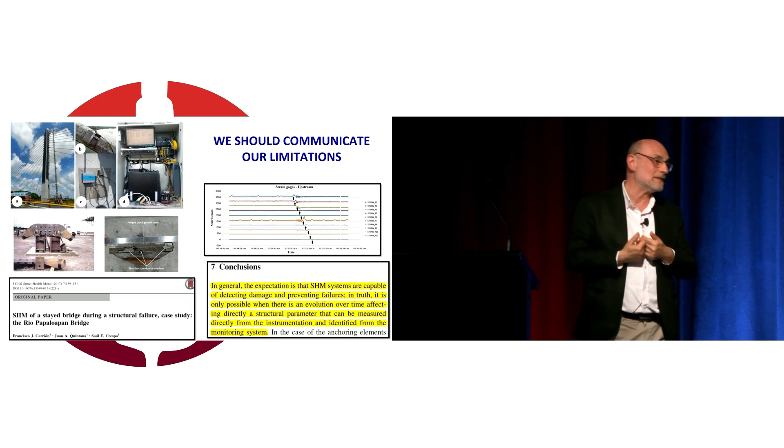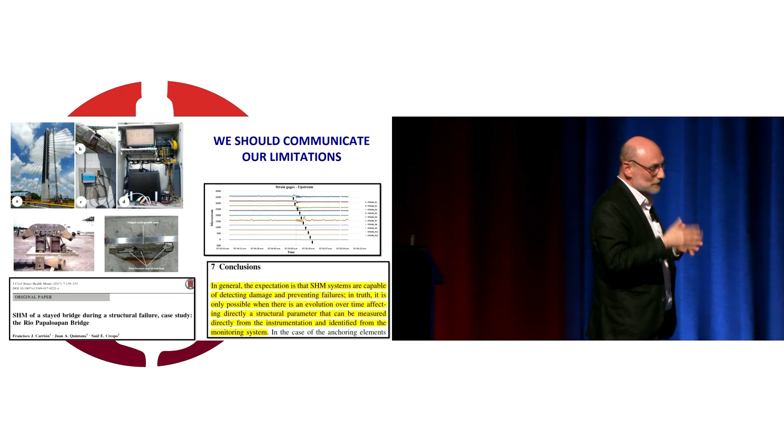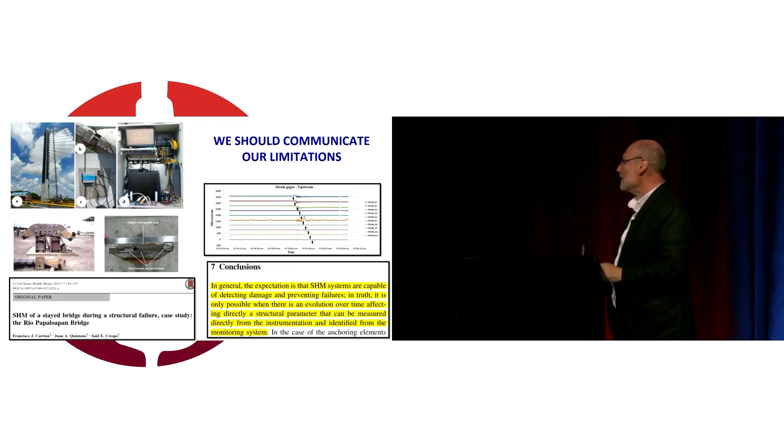So we realized that we were producing too much information, and it's not possible for a human to solve it. Of course, now we have AI and everything else, but you have to act. This is the main thing I want to leave in this talk: we have all these tools, but if we want to react, we have to be very careful.

So here we have three things I always consider. First, the cost: you have the initial cost, which is very cheap compared to the benefits, in my opinion. For example, one channel of a good accelerometer is $1,000, while from a MEMS sensor it's less than $12. Then there's the buying process, you need some administrative steps to purchase it, and installation generally costs between 2 to 5 times the value of the sensors, more or less.

Then you have to pay for maintenance. If you have a very expensive and robust sensor at the beginning, your maintenance will go down. But if you have cheap sensors, your maintenance will go up. And it will depend on you how you balance.

If your personnel is close to the sensors and installation and is low-cost personnel, then go with cheap sensors. But if you are far away from the infrastructure, you better have very good sensors because you don't want to maintain them often.

The other cost is operation. You don't just need to maintain it, you need to operate it. You have to do something with the data, so you have a center for collecting the information, then you have operators taking decisions.

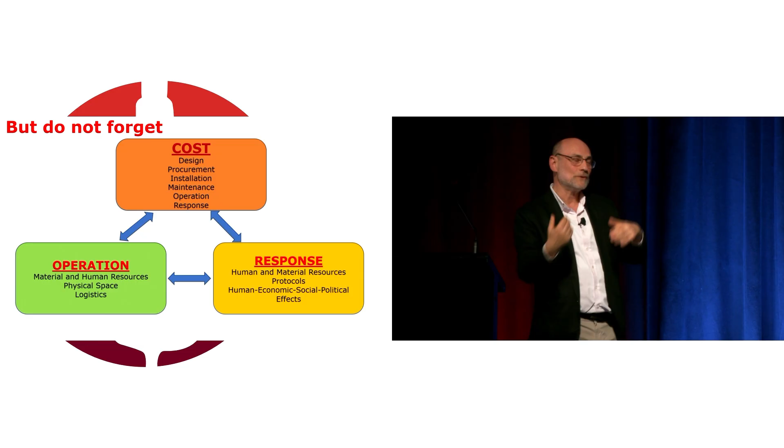The nice thing about this is that now I have mode shapes and everything. I have to correct for perspective distortion and many other things that occur in the vision condition. But now I can have a lot of information.

I think in the future we will have a mix of videos, accelerometers, and strain gauges giving us a lot of information, but it will have to be processed by some artificial intelligence and will give us messages that are easy for us to handle, or at least we will be prepared to handle. Thank you.

But if it's handheld, I can get it to a centimeter or less. If it's fixed, for example in the tuned mass damper, I can get a millimeter or even less if I have many points, because when the earthquake is shaking, the camera is also shaking, so it's just the relative motion between the two that I'm capturing - so 1 millimeter or something like that.

There is a technique called visual microphone that was developed by a Google researcher. If you have, for example, a bag on the table and you film it and magnify the motion - what is called phase magnification - you can record your voice from the vibration of a glass, a bag, or a leaf on a plant close to you. It's very precise.

But it depends a lot on the conditions - it's an additional tool. For example, in a high impact lab in the northern part of Italy, the only sensor possible when they are doing high impact load testing is vision. There is no sensor capable of resisting a blast, so they monitor all the particles using just vision.

Is there something more precise than that? Yes, but we don't have it, we cannot use it, so it's a tool. You have to recognize it's not perfect. I prefer an accelerometer in terms of precision, but if I don't have it, that's good too. I'll have less than 10% error if you want a gross number, and if you do it right.